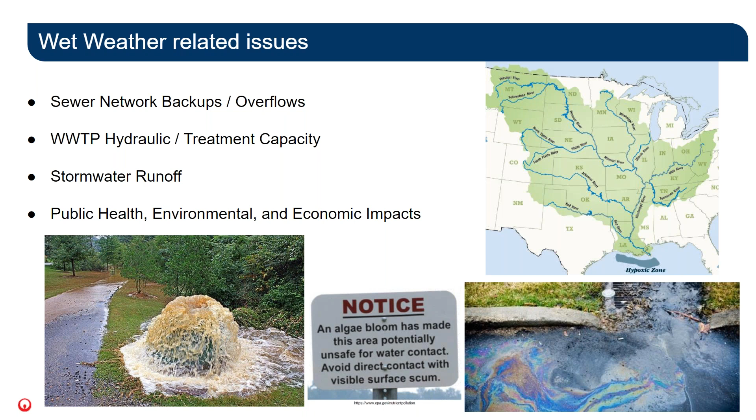In addition, there's the economic impact associated with this. We talk about the ability to effectively treat from a drinking water perspective due to these contaminants, industries such as the fishing industry, but also recreation and tourism impacts as well.

So jumping into the challenges that municipalities deal with, managing these impacts is one of the largest and most costly challenges that municipalities face. And they do this with limited resources as well, in terms of manpower, in terms of budgets. These things shrink on a daily basis, as we all know. So doing all this with limited resources is hard enough, but you tack on some of the other challenges that we'll talk about. Because of the impact of wet weather, obviously regulations are constantly evolving with the goal of eliminating those overflows and those diversions.

It starts at the federal level. States can influence that, and so you've got multiple angles. Oftentimes those utilities or those permitting levels don't always agree or align, and then there's also a lack of clarity. And we look at the past and present regulations of where we've come from.

You start back in 1972 with the Clean Water Act, and it really established our National Pollutant Discharge Elimination System that we still use today. It prohibited SSOs, or sanitary sewer overflows, and it went out of its way to try to mitigate the risk associated with combined sewer overflows. It also pumped a significant investment into the market to build that infrastructure to allow facilities to be able to meet the policies set forth with the Clean Water Act.

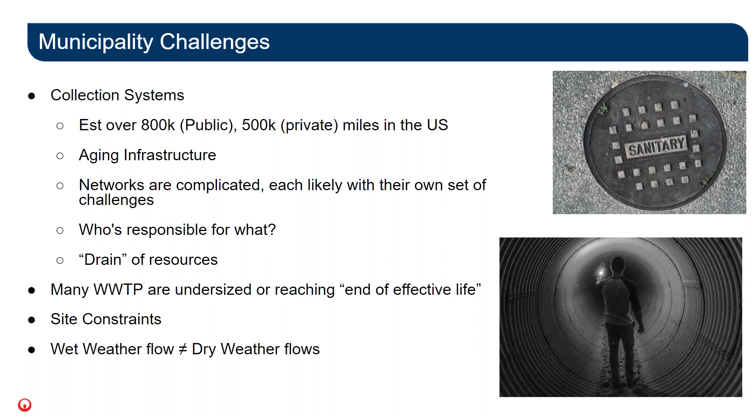And then you get the post-dilution on the backside as the event drags on. Usually the solids and contaminants are diluted. And so you're dealing with two animals, essentially the front end and the back end. And that is completely different than how they're typically operating with the dry weather flow. So managing the plant during that time can be stressful, dealing with not only the wet weather during the event, but also the operation as you come out and transition back to a more dry weather flow.

Talk quickly about urbanization as well. We kind of highlighted that, the increase of urbanization, the increase of impervious surfaces, especially with big cities. It basically just is increasing the amount of stormwater that enters our rivers, that enters our sewers. As I mentioned, that can lead to additional pollution as it picks up and runs across roadways and what have you, but also climate change.

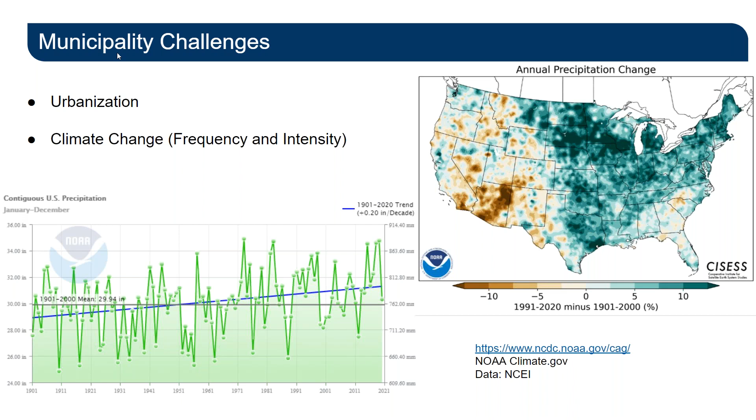And then when you break it down from a kind of territorial perspective, the graph in the upper right looks at the last 30 years in terms of an annual average flow and compares it to the 20th century annual average flow. And as you can see, there are many areas in the US that are seeing 5, 10, even more % on an annual basis increase than they saw in the 20th century. So again, it's all playing a role, and it's complicated for municipalities to deal with.

So now we understand the impacts. What are we looking at in terms of the solutions? Well, first and foremost, it starts with a comprehensive assessment, really getting into the weeds and understanding where the failure points are, what's the likelihood that these points within the collection system of the wastewater treatment plant are going to fail, and then what their ultimate impact is going to be. And oftentimes that's process modeling, it's hydraulic modeling, and hiring a consultant and working with them.

And at the end of the day, it's understanding not only what your projected peak wet weather flow is, but what can my collection system handle from a hydraulic, but also a treatment capacity perspective, and identifying where those weak points are. It also is doing a deeper dive on the sewer and putting more monitoring means in there, modeling it as well to really understand the dynamics of that sewer during wet weather events to, again, help with that plan moving forward with respect to where do we need to focus on our improvements, where can I implement additional control strategies to help mitigate and manage that flow. So all that info is important for a plan and path forward.

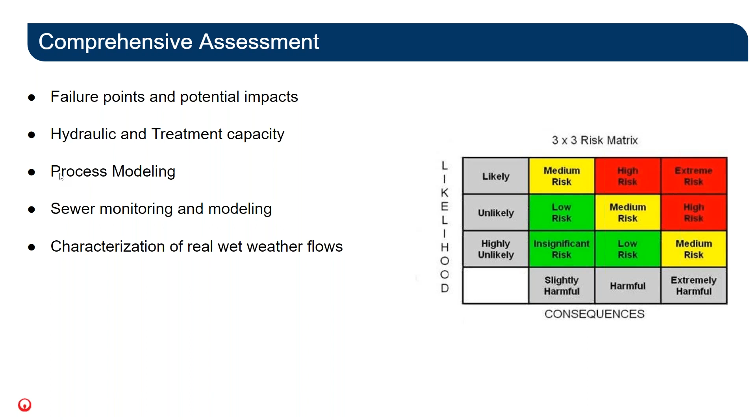And then characterization of that real wet weather flow, taking data, what does the peak flow look like? What does the peak solids look like? How long does it last? What's my dilution factor on the backside? As much data as you can collect on a wet weather event, and multiple wet weather events, is only going to help with respect to understanding the end game.

And at the end of the day, in addition to every wastewater treatment plant being different, the challenges that each wastewater treatment plant sees during wet weather are also unique. And so there's no one single solution. But there are tools in the toolkit that a collection system or that a utility can look at. And we'll talk through some of these, the first being the collection system.

Obviously, the biggest focus is how can they reduce infiltration and inflow? When I get an influx of flow, is it additional sewer maintenance? Is it additional rehab? Are there opportunities to increase capacity, whether that be within the network itself or on site at the wastewater treatment plant? And are there opportunities to control those flows and provide some flexibility with what ultimately ends up getting delivered to the wastewater treatment plant?

Storage is also part of the solution. Is there ability to take advantage of either on-site existing storage, implementing it within the collection system, what have you. But storage allows you to shave off some of those peaks and really limit the ultimate peak flow that may end up at the plant. There are challenges with both. Obviously, the collection system, as we talked about, is complicated. It's costly, and it's often a never-ending endeavor, as I mentioned earlier.

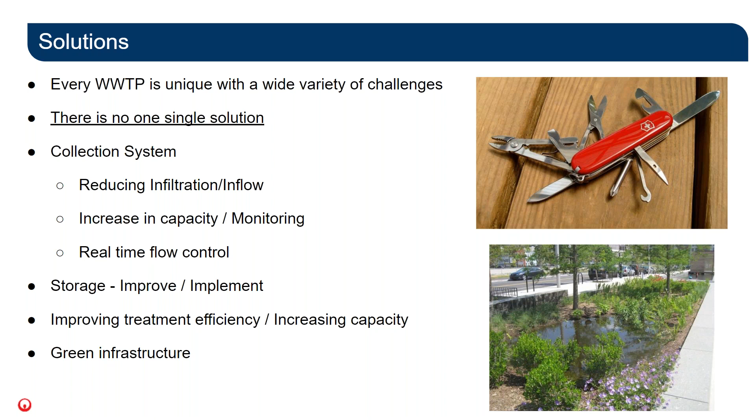And then another debated topic is green infrastructure. Dealing with the stormwater flows, and rather than relying on the impervious surfaces, can you implement surfaces that are designed to soak up that water and limit the amount of water that ends up in our sewers with natural areas, swales, green roofs, and what have you. So again, all part of the overall picture and many tools that a utility or a municipality can rely on.

So looking at some of the treatment options, when we talk about what a treatment facility will look at with respect to on-site performance, conventional clarification, you're typically talking conventional clarifiers. Oftentimes there's maybe an ability to re-rate those or enhance them, say with chemical addition and kind of converting it to CEPT. Plates and integrating those is potentially another option. Not done a lot here in the US, but it has been done with some success overseas. Vortex separators, even new technologies such as primary filtration. So lots of things to consider and evaluate when a utility goes through this type of scenario.

And then from a secondary perspective, are there opportunities to increase capacity, add on additional trains, make use of what's there and just make it more efficient. And that could include the way you control your secondary basins as well, whether it be step feed or implementing scenarios that allow you to settle solids throughout the length of the basin to help increase the hydraulic capacity a little bit during those peak flows to help avoid any biomass washout.

And then I want to shift gears just for a little bit and talk about some of the advanced treatment steps that have been proven, especially here in the US and globally, as part of an overall solution to help facilities minimize overflows. And that is enhanced high rate clarification, as well as biologically enhanced high rate clarification.

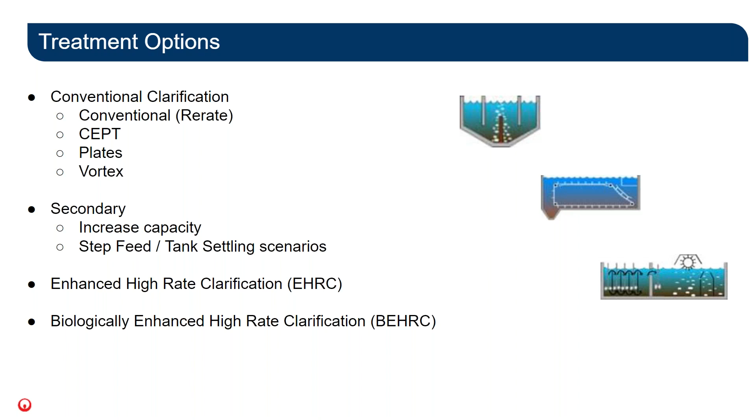When we talk about enhanced high rate clarification, we're talking about a physical chemical process that uses your standard coagulation flocculation process that have been around for decades. And so it's taking that chemistry aspect and enhancing it with a ballast, and in this case microsand, to really act as an anchor. So you develop the pin floc and the flocculated material, and then you just tag an anchor onto it, and it settles out like a rock. And it's this efficiency that allows for a very short startup time with respect to the process, which is very important from a wet weather standpoint, being able to react in a timely manner.

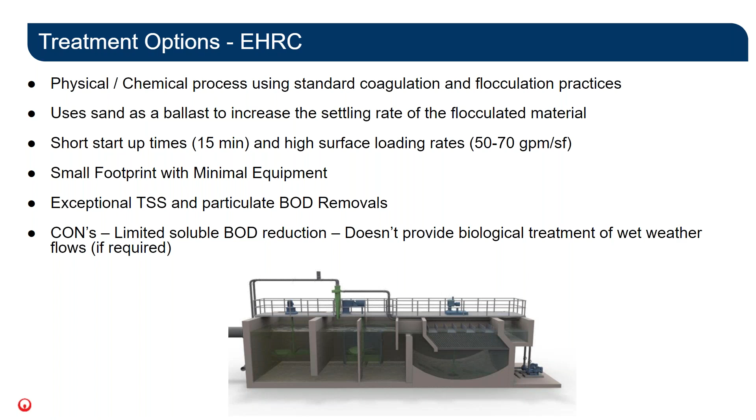But it also means very high surface loading rates in terms of 50 to 70 gallons per minute of treated capacity per square foot. So a very compact footprint, oftentimes works well in plants that have limited footprint available, and it helps reduce overall project costs via the construction aspect. And because of the ballast and taking advantage of that coagulation flocculation process, enhanced high rate clarification is very efficient in terms of TSS capture, and really anything that can be coagulated and removed, including particulate BOD. The challenge becomes the soluble fraction of that BOD, and that's where enhanced high rate clarification really becomes limited when you consider secondary standards and meeting TSS, but also total BOD capture.

As a result, we put a lot of time and effort into developing biologically enhanced high rate clarification to help solve that challenge. And it pairs contact stabilization with the same enhanced high rate clarification that we previously talked about. So two proven technologies combined together to really focus on not only TSS, but total BOD. And the way it does that is it utilizes an upstream contact stabilization basin and takes advantage of the excess biological activity of a plant.

So it's going to borrow a very small side stream of RAS from the main plant, mix it within the influent stream, and really afford any soluble BOD to uptake and absorb onto the mixed liquor to reduce that soluble fraction before that mixed liquor enters into the high rate clarification step, again, for efficient settling of the solids and allowing biologically enhanced high rate clarification to meet secondary standards with respect to total TSS removal as well as total BOD removal.

And because really both enhanced high rate clarification and biologically enhanced high rate clarification can operate from the very beginning to the very end. It can operate at high flows and low flows. It can see and handle the peak solids, and it can handle the dilution on the backside.

And that's a big advantage for high rate clarification. Biologically enhanced high rate clarification takes it a step further because it can meet those secondary standards. It can do it without blending that water back in with the main plant. And that really can provide a level of confidence for operators. They've got enough going on during a wet weather event. Relying on a system that can just do what it needs to do to meet permit, it's got to provide a lot of operational flexibility.

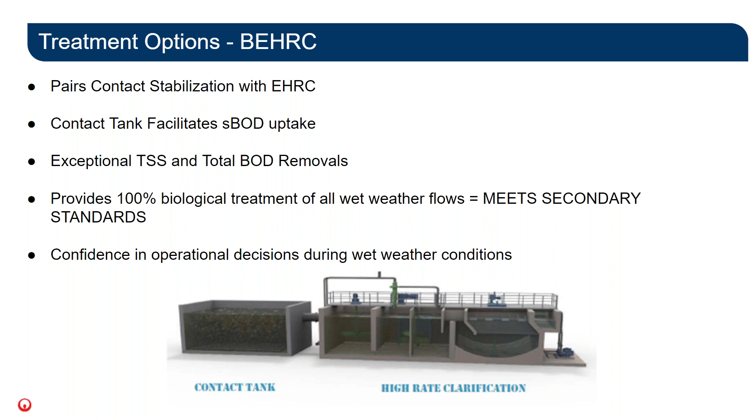So taking just a quick look at how these fit within the process flow of a plant. First, on enhanced high rate clarification, again, peak excess flows beyond the capacity of the plant are diverted around and sent directly to enhanced high rate clarification. Again, focused on TSS removal, particulate BOD removal, phosphorus, and then that gets clarified, effluent sent, and it's then blended back in before disinfection. Any solids captured are then either sent to the head of the plant or to existing solids handling facilities.

Again, this is typically your combined sewer type setups. And in this case, enhanced high rate clarification can be either in parallel to the main plant or located out in the collection system.

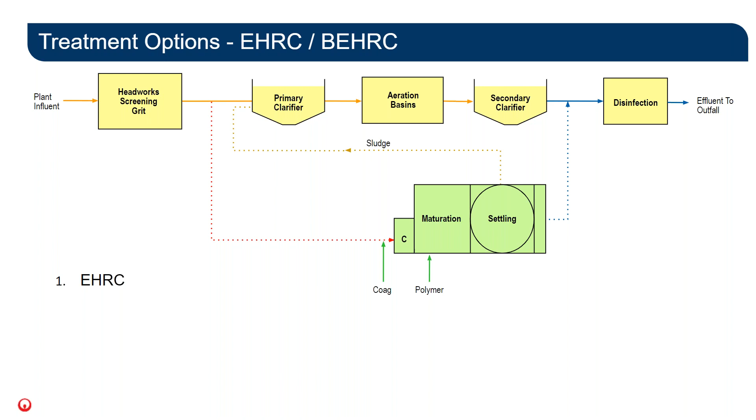Looking at biologically enhanced high rate clarification, again, very similar principle as we just talked about with enhanced high rate clarification, but it combines that clarification system with the contact stabilization basin upstream. Again, peak flows diverted around the plant to protect, whether it be the primary clarifiers or the secondary basins. And again, we're going to borrow just a small side stream of RAS, blend it in with the influent stream, and mix everything within that contact tank and allow contact of the mixed liquor with the influent stream to absorb and uptake that soluble BOD onto the mixed liquor, reducing the soluble fraction.

And then this carries through into the efficient clarification step of enhanced high rate clarification, where we get the solids removal, the solids coming on the influent stream as well as the mixed liquor and RAS, allowing the system to meet not only greater than 85% TSS removal, but also greater than 85% removal of total BOD as well.

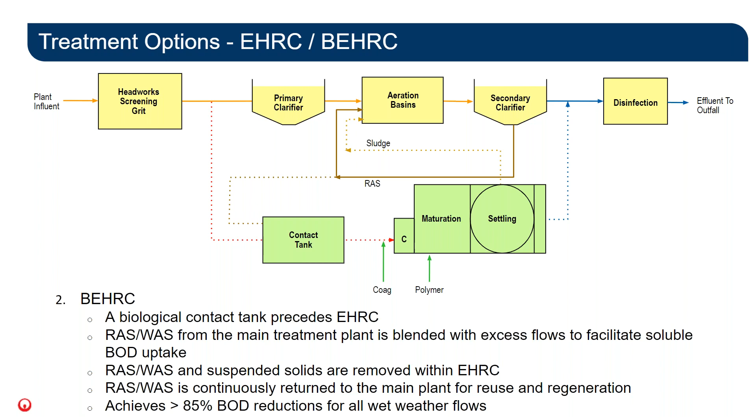Of course, RAS is very important to the main plant. So again, we're only borrowing it. As it makes its way through the process, we're constantly discharging that RAS back to the secondary system for reuse and regeneration. So it just works like clockwork. That RAS is not in the system but for 20 to 30 minutes at most before it goes right back on a continuous basis to the main plant.

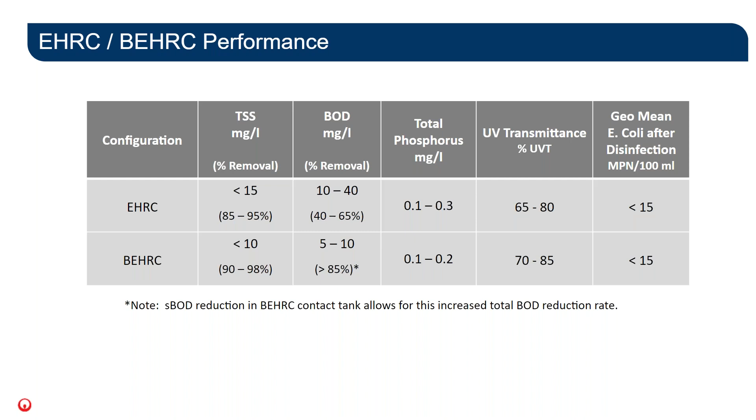So looking at some of the differences in performance, as you can see, both systems are very efficient in terms of TSS removal. The BOD is really the difference here. As I mentioned, it's all dependent on that soluble fraction of BOD. And while you will get some total BOD removal, primarily the particulate fraction, with enhanced high rate clarification, in order to meet secondary standards, biologically enhanced high rate clarification is needed to uptake soluble BOD, reduce the soluble fraction, and therefore allow you to meet both total TSS and total BOD. Both processes are very efficient in phosphorus removal as well as UV transmittance and disinfection, which plays into E. coli removal as well.

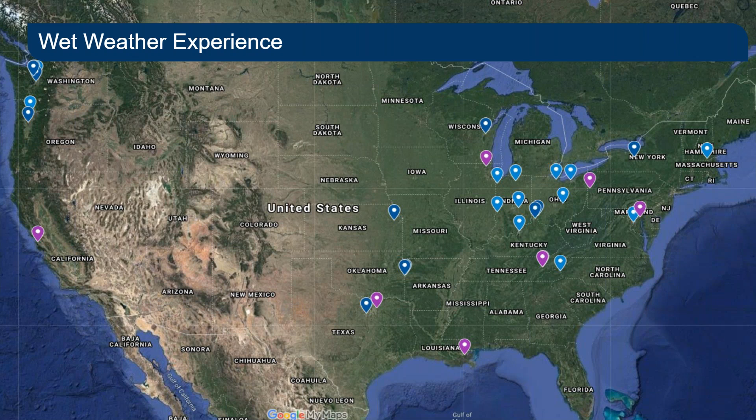So shifting a little bit now to talk about some examples of what we've seen with different municipalities and how they've handled not only identifying their challenges but how best to manage them. So the first facility I want to talk about is in Knoxville, Tennessee, operated by Knoxville Utilities Board, which partnered with CDM to evaluate their treatment step and their collection system, due to a 2005 consent decree issue, with the goal of essentially eliminating SSOs.

Obviously, with the consent decree, a composite correction plan is required. And so again, in coordination with CDM and their efforts, they went through a pretty exhaustive evaluation. It started with a comprehensive performance evaluation, which is really focused on identifying the weak points in the wastewater treatment facility and the collection system: understanding what the limitations are, where the weak points are, what's the likelihood that they'll fail, and at what point an SSO or diversion will occur.

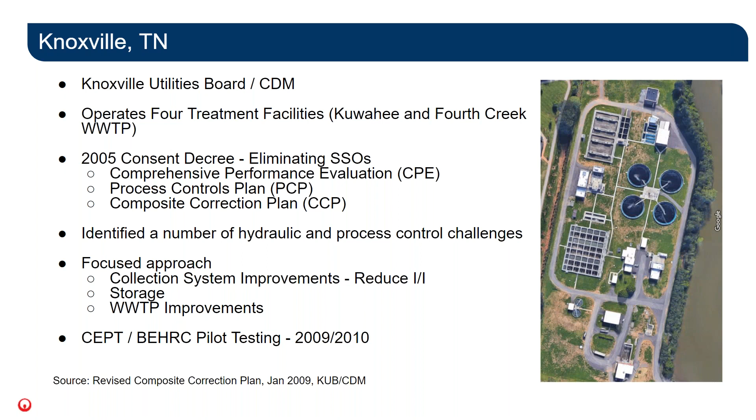Now shifting to the Fourth Creek facility, because it was the first installation. As I mentioned, Kuwahee is a much larger facility. It's crammed in the middle of downtown Knoxville up against the University of Tennessee, with a road going down the middle of the plant. Because of its size and complexity, they wanted to work out the kinks of construction and of integrating biologically enhanced high rate clarification before focusing on the Kuwahee facility.

So in 2014, at the Fourth Creek facility, they implemented just enhanced high rate clarification, gave the operators a chance to get familiar with the system, worked through the kinks of construction, and then converted to biologically enhanced high rate clarification in 2018.

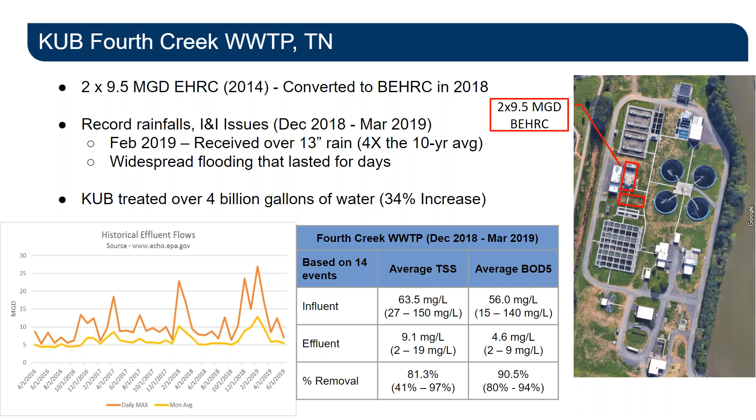Switching gears a little bit now to Lawrence County, New Castle Sanitation District, teaming up again with AECOM in response to a 2011 consent order. Their goal was eliminating bypassing of flows greater than 18, and that is their secondary treatment capacity hydraulic limitation. They do see peak wet weather flows upwards of 38 MGD, but secondaries really were the primary concern. AECOM worked with the district to understand the problems. So challenges of peak instantaneous flows. They also see sustained high BOD and TSS loadings during these events.

They also deal with a very complex and convoluted network, very vast. They support surrounding cities and townships in dealing with those wet weather issues, but oftentimes they don't manage or control those sewer systems. There's a lot of collaboration, a lot of effort needed to maintain the sewer networks. And the age of the facility also played a role. Not only is it reaching its end of treatment capacity, but it's just not as efficient. They also have a lack of redundancy, especially in key areas, so when something went down, it compounded their problem.

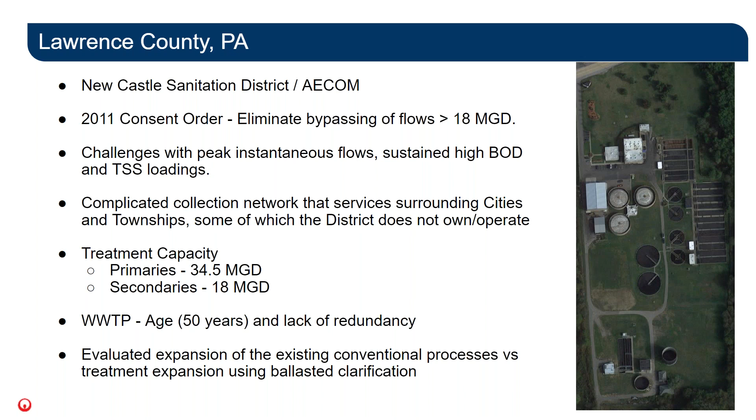So once they understood the challenges, they looked at a number of things, and we'll talk about those in the next slide. They did look at expansion at the wastewater treatment plant with their conventional system. They also looked at side stream treatment of that peak flow with ballasted clarification as well. And so it was a staged approach for them. They started in 2015 with a 1 MG EQ basin to help mitigate some of those peak flows to the plant. They also put in a stormwater management program in 2018.

It focused on the obvious: the repair, the replacement, identifying the challenges. Can we put in additional stormwater lines, repairing where necessary, especially with stormwater manholes. Again, talking about additional capacity, where can we add it? There was a lot of talk and a lot of integration of that. But they also invested in tools to help them manage and identify where they needed to focus their effort. So they invested in sewer cameras and cleaning trucks, really to help operation and maintenance of that collection system.

And from a wastewater treatment perspective, they're looking at a number of things. This project, from a wastewater treatment improvement perspective, is currently under construction. They're looking at converting another digester to a wet weather EQ basin, but also a pumping station that will send flow to the biologically enhanced high rate clarification system. They're looking at improving the split of flow between the primaries. As you saw, the primaries have a higher capacity, but not quite covering the 38, and they're hoping that this improved flow split will help the primaries during those peak wet weather events as well.

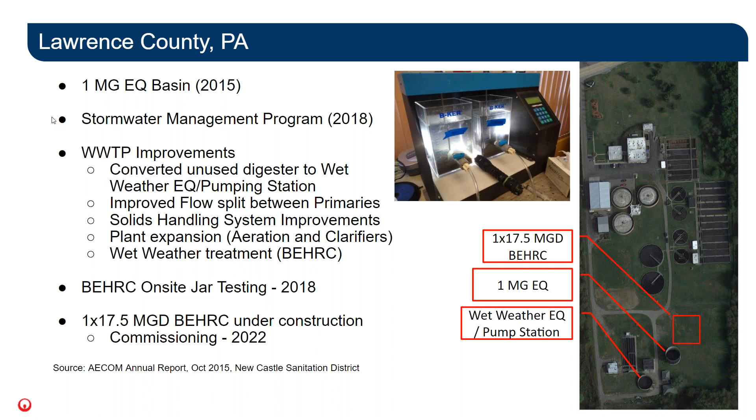We talked about redundancy. The solids handling system was one of them. They put in some additional redundancy, as well as plant expansion with their aeration and secondary clarifiers. We did some on-site jar testing in 2018, really from a training perspective, a validation perspective, but also to quantify the OPEX of the biologically enhanced high rate clarification. Like I said, it's under construction now, and hopefully online and commissioned in late 2022.

Shifting to our last reference point here, City of San Mateo, teaming up with HDR and Brown and Caldwell due to a 2009 cease and desist order, again with the focus of eliminating those overflows and blending associated with wet weather.

A couple of PERs were done via CH2M Hill and Carollo. The first one in 2014, it was amended in 2019. Very similar challenges, right? The hydraulic challenges associated with the network, associated with the collection system, and unique features as well. Their collection system, very vast. Again, they have the similar challenge of surrounding communities and dealing with who's responsible for what.

But also, a majority of their collection system was built in the early 20th century. And due to the standards back then, many of the pipes are less than 6 inches. They're prone to plugging even in dry weather flows, but also they were built in very short segments. And so you can imagine, if you've got joints, those joints are the weak points. And so you've got lots of joints now that potentially are failing, reaching their limit of age, and potentially increasing the I&I associated with it.

At the wastewater treatment facility, obviously very similar challenges in terms of age. It was built in 1940. It went through a majority of its upgrades and repair of equipment up until about 1980. So the majority of the equipment on site now is greater than 30 years old. The secondary capacity is limited to 40 MGD currently. And based on Carollo's effort in 2014, they do project a peak wet weather flow of 98 million gallons a day.

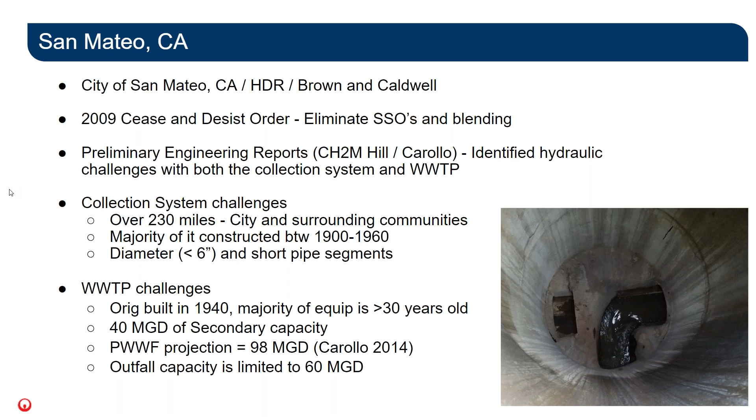Another unique aspect of this is the outfall capacity. The city is limited to a hydraulic capacity at their outfall of 60 MGD. So again, understanding all of that really helps tailor the solution moving forward. So what did they do? Again, collection system focused, focused on sewer repairs, also capacity increases, whether it be pump station upgrades or adding and rehabbing existing relief pipelines. A lot of their sewers are in right-of-ways, and so there's an impact to businesses and roadways, and so they were looking at ways to integrate relief pipelines to alleviate some of the challenges.

They are integrating storage, 8 million gallons of storage, both on-site as well as out in the collection system. That will reduce the peak flow by about 40 MGD. Again, that comes with the ancillary equipment that we talked about. Due to Title 22 standards, they are converting to IBR, and they did evaluate Bioset versus biologically enhanced high rate clarification. Bioset is kind of a dual primary clarifier that can operate both dry and wet weather. And what they found through an exhaustive evaluation is that biologically enhanced high rate clarification can save a pretty significant amount on construction and excavation. And so biologically enhanced high rate clarification is selected, and that one should be online in late 2022 as well.

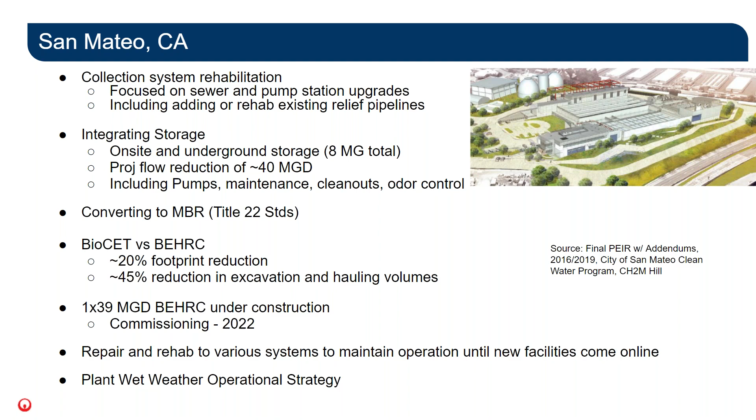Because they're transitioning, obviously there's a function of rehab and repair to the existing system, again, to maintain operation while they're building the new facility. And then the strategy aspect of helping the operations staff and putting a plan in place when wet weather happens. So with all that, my takeaway is, the impacts of wet weather are not only challenging themselves, but the hurdles that municipalities deal with during a wet weather event, and finding the best way to navigate them is the biggest challenge. Obviously, the severity and the frequency of storms, urbanization plays a large role now, especially in large cities, and then the aging infrastructure and the costs associated with managing all that.

As I mentioned, comprehensive evaluation is absolutely key. Understanding the risk and the failure points, the likelihood that they'll fail, what will happen when they fail, and really make sure you understand the problem before you put forth a solution. And then the solution can look like a number of things, but a lot of the time it's focused on three key areas: reduction of I&I and maintenance of that sewer system. Oftentimes that's an operation and maintenance incentive plan to really drive improvements within the collection system and maintain that capacity. Storage is a key player as well to help shave some of the peaks. And then increase treatment capacity, and advances like biologically enhanced high rate clarification have shown and are well established as a proven component to any overall solution that a facility has to manage.